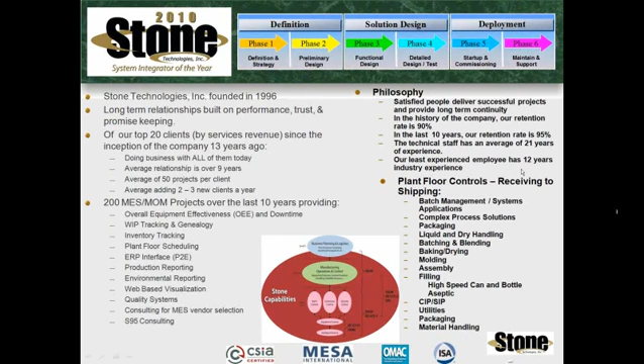Thank you, everyone, for attending this afternoon. Before we get into the actual presentation, I wanted to start with a background about what OEE is so we all start at the same place, so we understand the calculations and the pieces and parts that we're going to be dissecting with SPC today.

When you take OEE, it's a simple calculation of availability times throughput times quality. Availability is your running time divided by your available time, run time in this example being the actual time you're physically producing a product. Available time is the amount of time you should be producing product. The throughput calculation can be looked at as your total parts through the system times your ideal cycle time, or theoretical maximum, divided by your run time.

Your quality calculation looks at good parts divided by total parts. If you reduce that down, it becomes your ideal cycle time times your good parts, divided by your available time. Throughout this presentation we'll be talking about those individual pieces, and we're also going to start talking about what can impact those different pieces of the calculation.

The data collected for this example was from an actual line, a high-speed packaging line, a filling line. It's an actual production line that was in production on one shift that we're looking at. The data was gathered through Rockwell Software's FactoryTalk Metrics product.

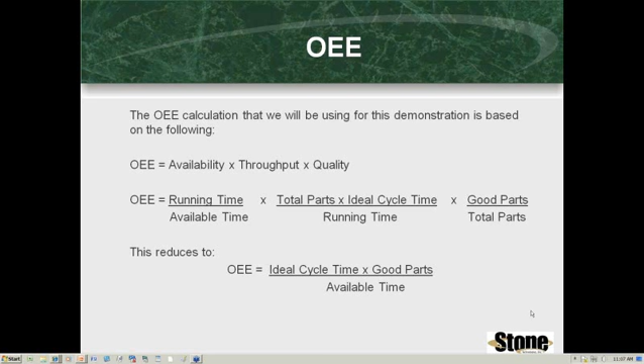So for today's example, we're actually going to look at SPC applied to an overall line. We're going to be looking at the pieces throughout the line of the OEE throughput, quality, and availability, and then we're going to go detailed into a specific work cell. So our first slide that we're going to be looking at is looking at an overall packaging line.

That packaging line is arranged as the depalletizer, a feeder, a filler, a labeler, a case packer, and a palletizer. Looking at this, the line itself is a real line from a real customer with real data for one shift. The names of the pieces of equipment have been changed - the only one that is the accurate piece of equipment is the filler. For those of you who are on filling lines, you will be able to relate to the fact that the filler is the blood or the heart of the line. Without that filler, the rest of the machines - you don't make any money if things don't move through that filler.

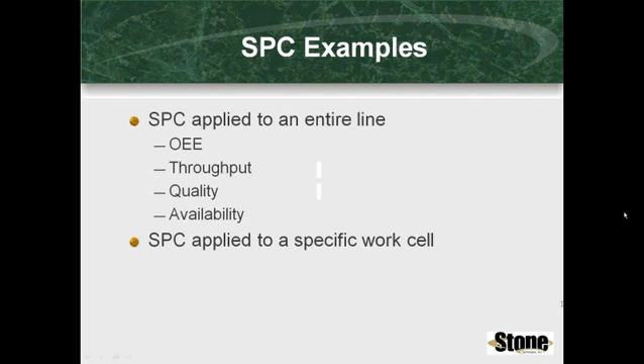So at a high level, we're going to start out here first taking a look at the overall line and some SPC charts of the overall line. And then we're actually going to focus really heavily into the filler and understanding the different pieces of information that we can obtain by applying SPC to automated OEE data collection systems.

This first chart shows that SPC and process-based analytics allow us to determine the range of variation and stability of OEE performance, and enable process engineers to manage and improve line performance. Here you will see box plots that show us the OEE variation at each work cell. The work cells are listed down along the left, and each piece has their individual box charts shown in the center. So the box plots are based on a median, which is the center line, and then the quartiles.

You're going to notice these little stars - they're statistical outliers. So if you take a look at the filler, this is our median, and these are our quartiles. So 50% of the numbers that were taken, of the statistics, were below the median, and 50% are above the median. 25% are in this box, and the upper 25% are outside the box to that exterior hash mark. So what's interesting about this chart is that you can actually see that the case packer and the palletizer are typically up over 100% OEE in a lot of their cases.

What's interesting here is that they most likely sped up this line during this period for this one shift we're looking at on June 1st, 2009, speeding it up at the end of the line to feed it out. Remember, the line is only as fast as the filler can produce. But you can see their actual speed is probably faster than the theoretical maximum for these pieces of equipment.

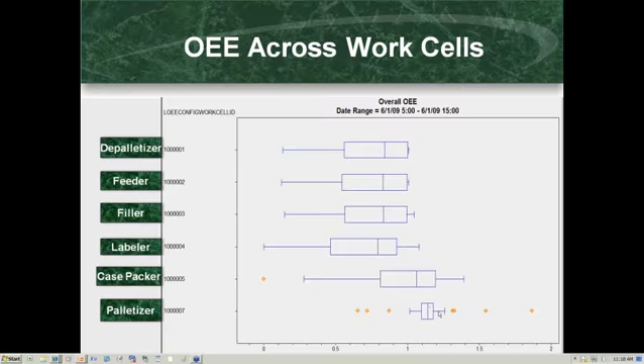Let's take a look at our control limit charts for each piece of equipment on the line, starting at the depalletizer, the feeder, the filler, the labeler, the case packer, and then the palletizer. Control charts show the process stability for each work cell and provide signals to the engineering staff whenever there's a process instability. You'll notice in these charts there's an upper control limit, a lower control limit, and a center line. The little stars or asterisks are actually rule violations.

Placing all 6 work cells together on one chart allows you to start seeing the trends that are happening and easily identify areas for opportunity that you may want to drill down into further. For this exhibit today, we're only going to be focusing in on the filler, in great detail.

But if you take a look here, you'll see that on the depalletizer we had 2 occurrences that broke the lower control limit. We had some statistical anomalies happening at the end of the shift, where the OEE on each piece of equipment is exceeding or close to the 100% mark. So when you look at these, you want to start focusing on the opportunities in each area.

When you have statistical outliers taking your OEE close to that 100%, you want to know what's going on at that period of the shift that you wish you could replicate for the rest of the shift. What's happening at these lower control limit breaks that you want to reduce or eliminate, so you can bring up your calculations? If you have an automated data collection system, you'd want to dig into the details of the events that took place when these lower and upper control limits occurred. What happened on the line at these points in time that we can eliminate in the future?

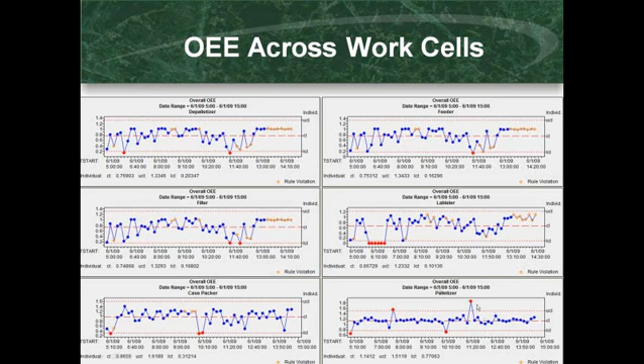We're going to focus in on the filler. Again, we're starting at the high level, which is the OEE portion, the calculation, and then we're going to get down into each piece: availability, quality, and throughput within the filler. If you take a look at this filler, you'll see we have 3 areas again for opportunity, with some lower control limit violations.

Looking closely here, our run seconds was only 74 seconds out of the available 600 — this is looking at a 10-minute window. That tells me something impacted the system and took it down for 525 seconds. That's a lot of time for it to be down. So whatever's happening at this point is something you want to try to eliminate.

With SPC analytics, we can drill down into each individual work cell and look at the stability of the OEE KPI at this filler workstation.

The next point we're going to explore is the second lower control limit violation. What's interesting about this one is that both the availability and the throughput are down. And once you take a closer look at the pieces of this statistical analysis, you'll notice the quality is actually down here as well.

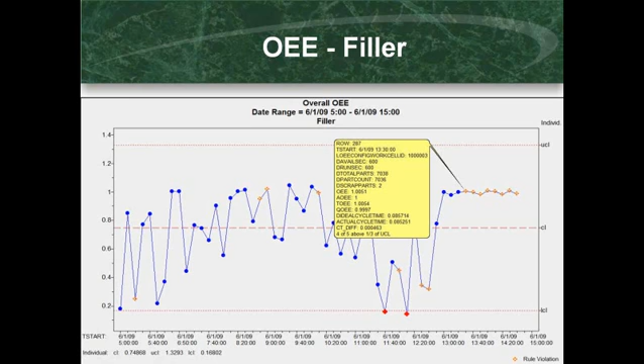When you think about rule violations, think of things like when you flip a coin and there are way too many heads. For example, maybe you flipped a coin 10 times and heads came up 9 of those 10 times. It's pretty statistically unlikely that that would happen. And that's what this is showing us here. It's statistically unlikely that this would happen. So it's important to understand what was taking place here so that we can replicate this in the future.

Now we're going to take the actual individual parts of the OEE calculation on this filler. Let's take a look at the availability.

So by allowing you to display all this information with NWA's product, it can give you a lot of detailed information to help you start looking at places for areas of improvement.

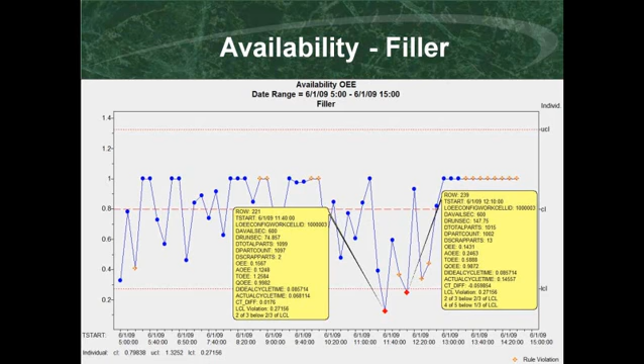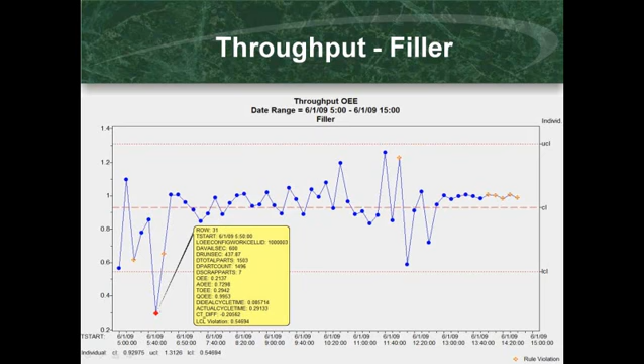So our final thought is to make OEE and performance management a part of your manufacturing culture. Remember, when applying a tool like this, it is a culture change. It's a way of dissecting the information to make changes. Change is not always easy for an organization, but having the tools to identify where those areas of change are, those opportunities for improvement, makes it easier.

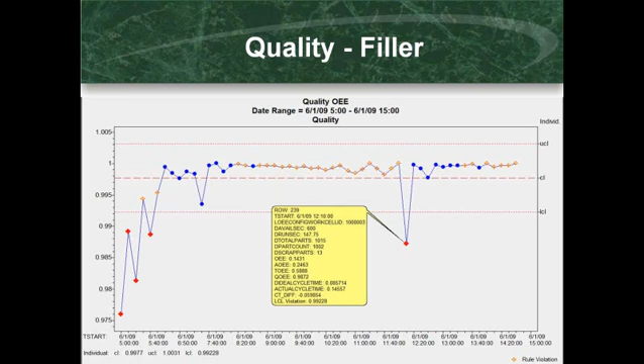It says, were those control charts generated from OEE or from Northwest Analytical? I'll let you answer that. The control charts were generated from NWA's product, Northwest Analytical. One of the virtues of putting these kind of systems together is to link these different components, and you end up with something much greater than the whole.

What is your experience in that kind of application? I'm sure Stone has done a fair amount of this. Yeah, the data acquisition is the piece that's important. Without the data, you can't apply anything else. But again, depending upon the audience who's going to be looking at the information, it depends on the tool that you're applying. For quality, for people who are in the quality area, the SPC is a fabulous tool for them to apply. So we apply a different variety of tools to the data that we acquire from a solution.

Right. Yeah, I was noticing in that first poll that 38% of the attendees were using manual OEE and 71% were using manual SPC. So that sounds like there's a lot of opportunity out there for people to get better performance. What have you observed as you bring people on to automated OEE as far as the kind of impact that has on their process engineering and management?